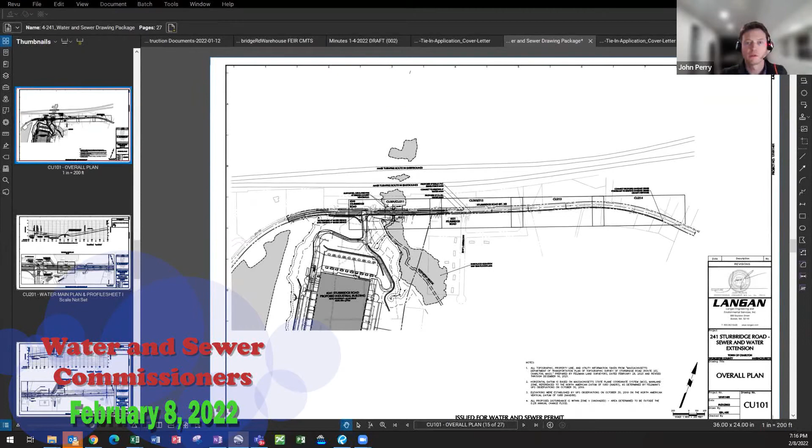What we're proposing is, currently in Sturbridge Road there's a 4-inch water line that comes down from the 10-inch. There's a 10-inch line that stops right around Mayberry Lane and turns into a 4-inch. So we're proposing to install a new 8-inch line to service our project, and we'd keep that 4-inch line in place until the 8-inch was installed and tested and approved and active, and then at that time we would abandon that 4-inch in place.

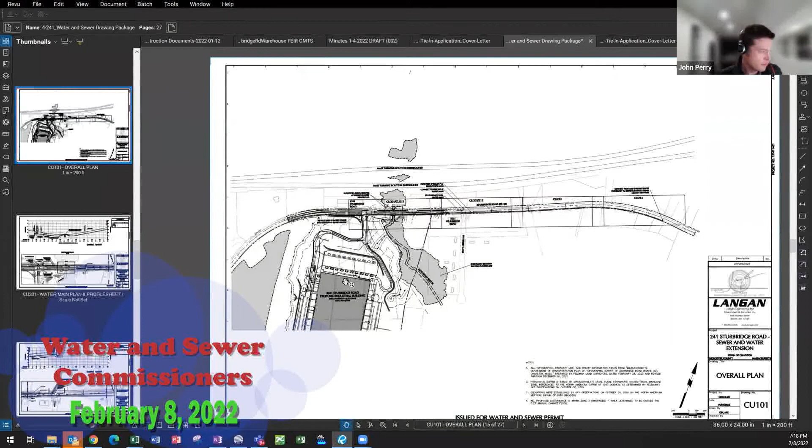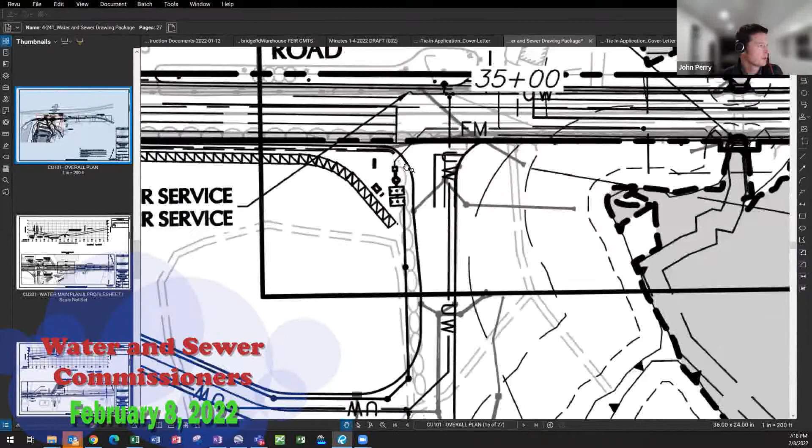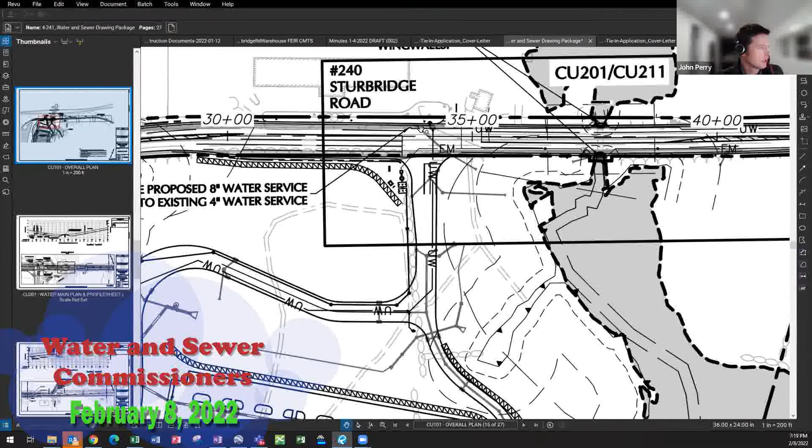This is the warehouse building here, and this is our proposed site driveway. So our pump station would be here, and our water connection for the site would tee into the new 8-inch line that we propose to bring down the street.

The pump station, Peter and I have coordinated on this a bit in the past, basically to design a pump station that is going to minimize the impact to the town system.

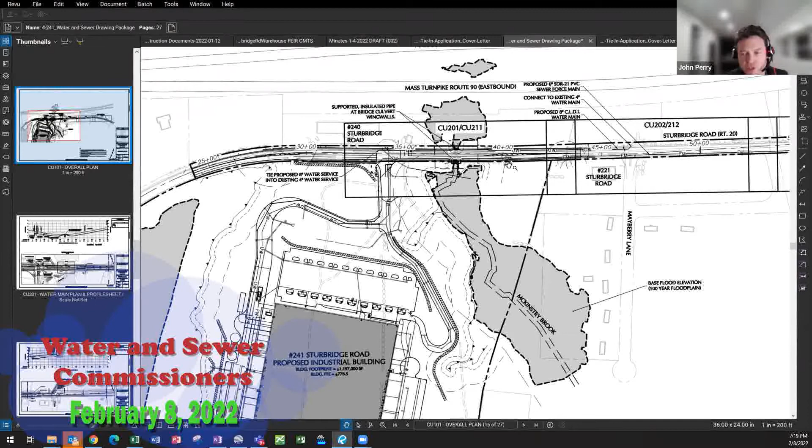So what we're proposing is a time-dosed system, and we would propose to pump basically overnight from 7 p.m. to 7 a.m. The theory there is that, assuming most of the flow you receive into your system is during the day, we would try to offset that to the extent we can.

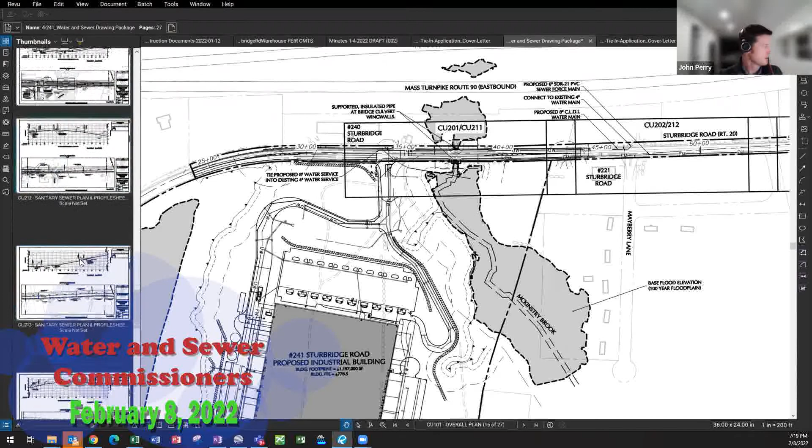So we would have, and I'll go to the detail plan if you bear with me for a minute. This is our pump station detail. We're proposing 2 holding tanks, each 7,500 gallons. So we would have 7,500 gallons of holding storage for the daytime period, which is obviously half of the daily flow.

And then we would discharge that overnight, as I mentioned before. The other 7,500 gallons is just emergency storage, just in case we have a peak in there or something like that. This would be hooked up to an emergency generator as well, so we've got some redundancy in there.

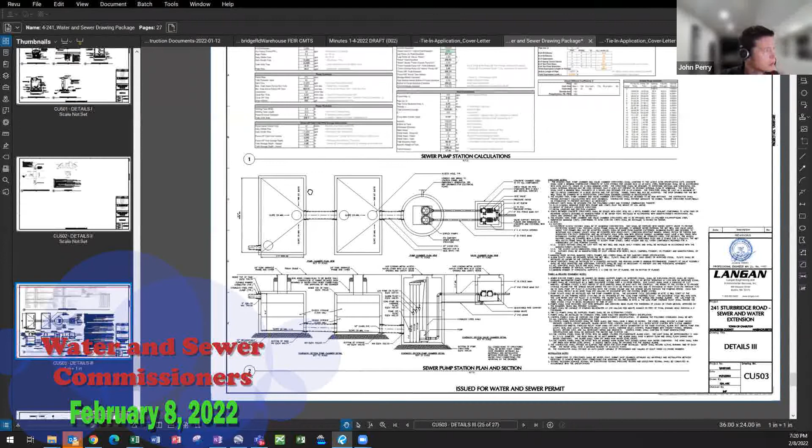That's the highlights. I'd be glad to get into any further detail or answer any questions.

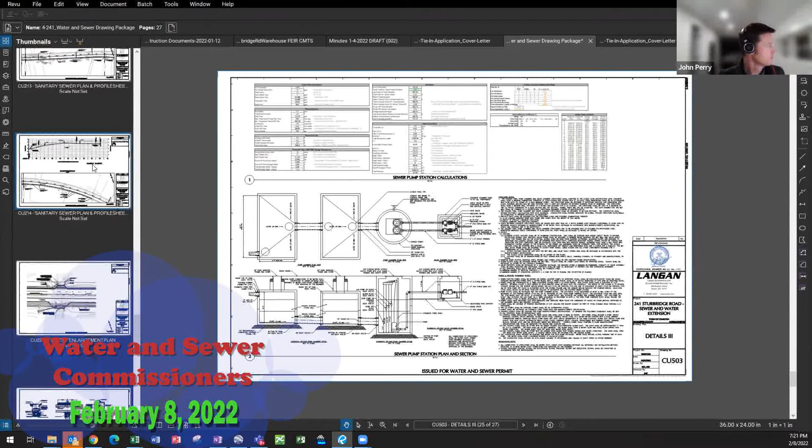John, can you talk about the laterals that you're leaving for the properties that you passed for the sewer extension? Yep, exactly. So go back to that main sheet. It's a little tough to see at that scale, but we are proposing 2-inch laterals off of the force main, and we have a lateral basically for each property between our site and where we tie in via gravity.

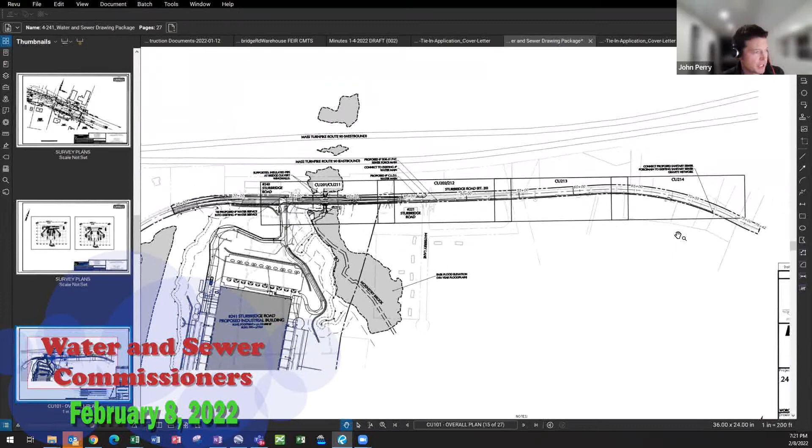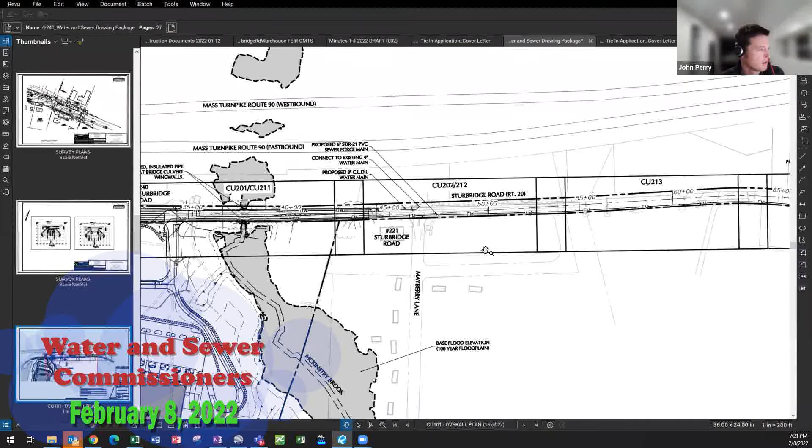We'd be providing a lateral for number 240 Sturbridge Road, 221 - there's a few lots that I believe are vacant lots, just looking at Google Earth coming down the way. I think we have something like 14 laterals along the way. There clearly aren't that many active sites there, I guess, but planning for the future, right?

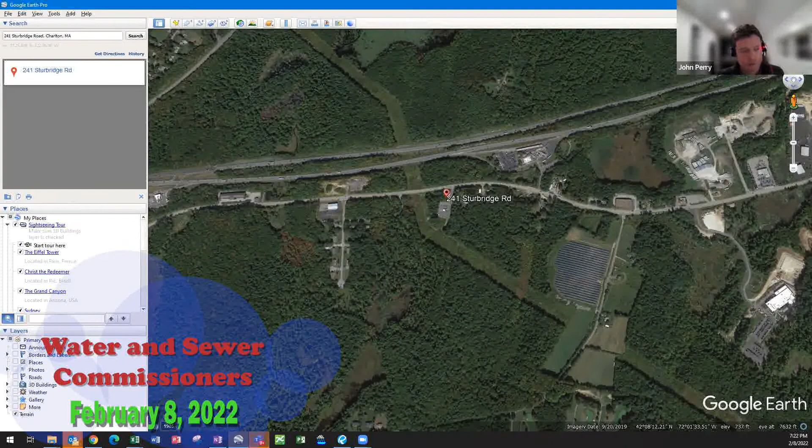So anticipating that those would probably be grinder pumps. I saw in your town standards, you want a 2-inch minimum force main for a grinder pump, so that's what we're proposing.

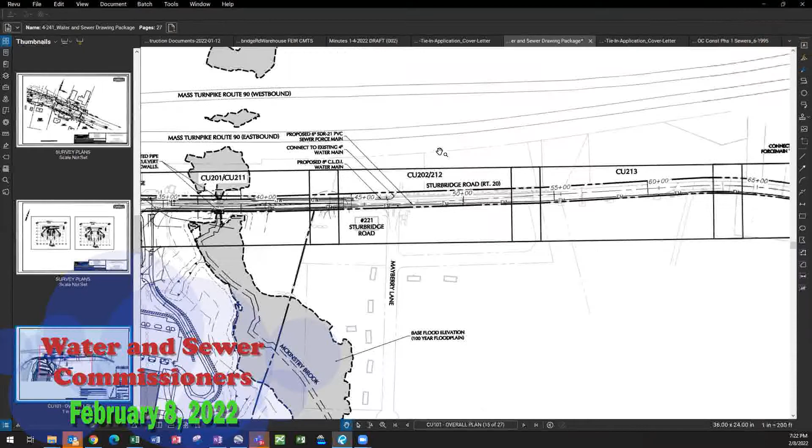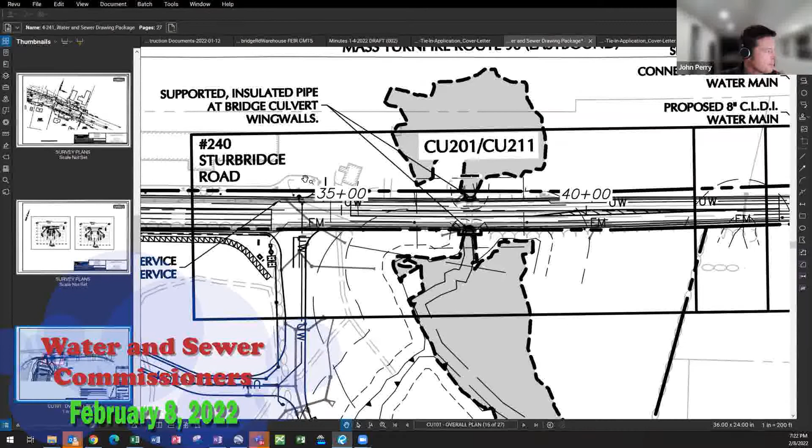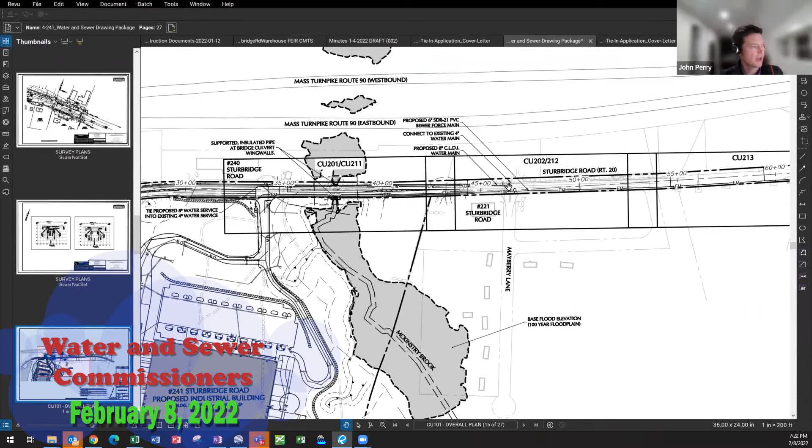We are also proposing a stub for number 240 Sturbridge Road for water as well. And we would be redoing the connection to Mayberry Lane for the water connection there too - I think that connection comes off of the existing 4-inch line, so we would be basically replicating that just to maintain their service, obviously.

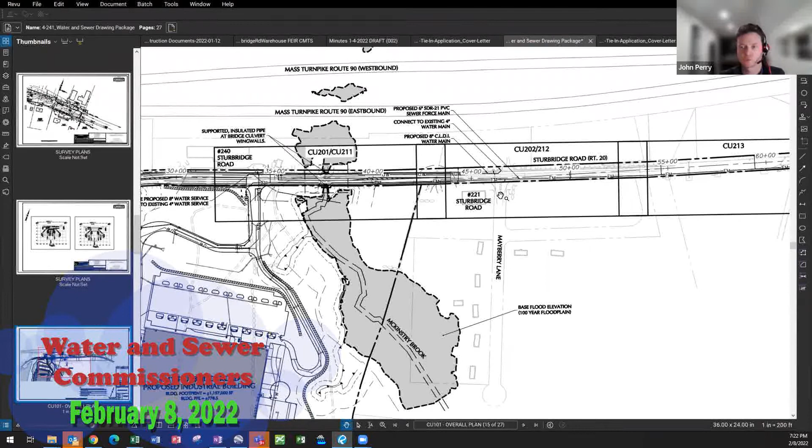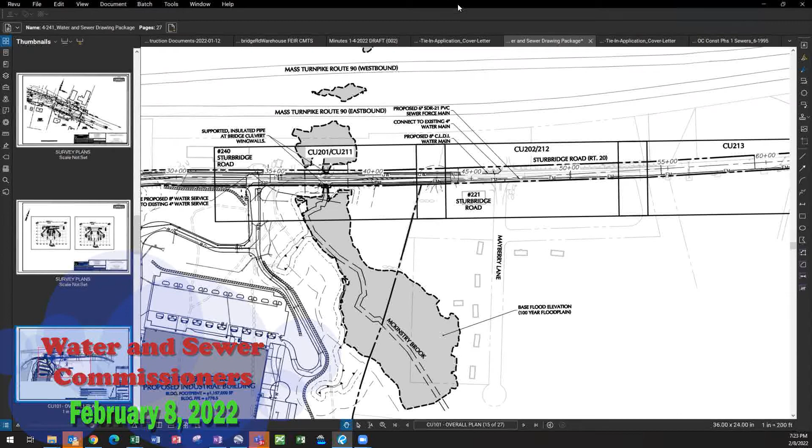I guess, do you want to let Chris McClure go first with his review, or do any board members have any questions at this time? Yeah, no, I'd love to hear from Chris and then take questions from there. I'll stop sharing.

Okay, good evening, folks. And I apologize, I was in the process - I just got these plans about a week ago. I will type up my review questions. But while I have John online, I'd just like to run a few things by him and also talk about the historical requirements by the commission and see what direction the commission is going to want to go with this type of project. So, John, if I could, is there a SIC code associated with this facility?

Industrial code - I ask because of the potential need for an industrial discharge permit connection through Mass DEP. Nope, there's not. And it's manufacturing - so is it a manufacturing facility, or is it just a warehouse, dry goods warehouse? Yep, dry goods warehouse, okay.

So we used warehouse, with no cafeteria, as the basis for the design flow - 15 gallons a day per person, estimating 1,000 employees here.

Is there a tenant identified for it? Is that unknown, saying that's why it's going to be a warehouse? Still unknown at this point, Chris. Okay, so there's no potential for industrial use to go in there, and I guess if there was, they would have to come back in front of the commission for that.

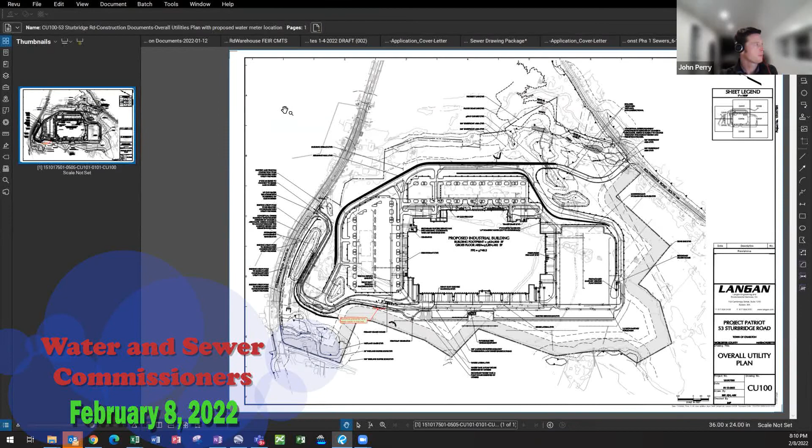I can. I don't have a great plan pulled up right now to show you, but what I can do is at least pull up the plan I do have, which is our utility plan. And actually, while I have you, I want to ask another question, just after I show you this. This is the utility plan. Actually, I wonder if I have a better sheet. Give me one second here. Let me show the roadway just a little bit better.

And the roadway is still being developed. The roadway improvements plan is still being developed. So what I'm going to show you is not final. It's conceptual at this point, but it's a good idea of what we're planning to do.

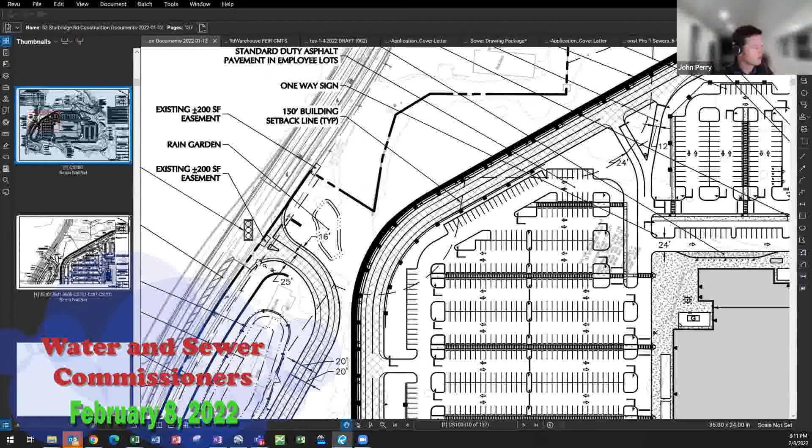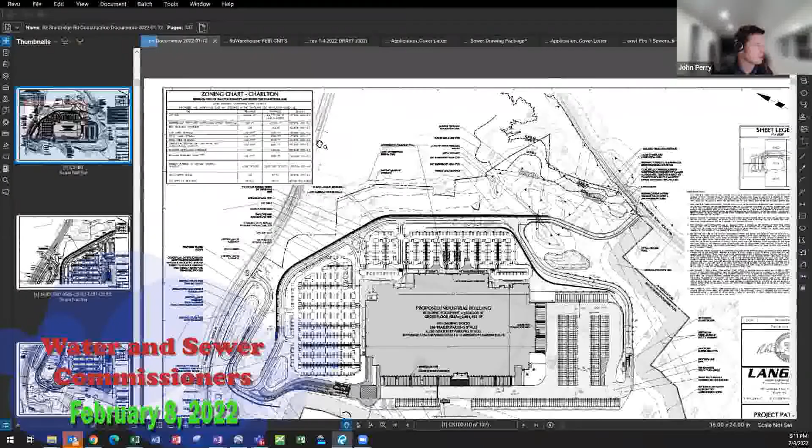So at the driveway of the site, which is here obviously at 53 Sturbridge, we're going to be adding a turn lane, a traffic signal, and then a turn lane in to our driveway from a left turn lane in from the east, and then the right turn lane in from the west. And that's going to require a new lane in each direction, so some widening of the roadway, which as we go easterly towards your pump station, and of course my zoning chart is right in the way of where I want to show you, there is a little bit of widening, but it starts to taper off there.

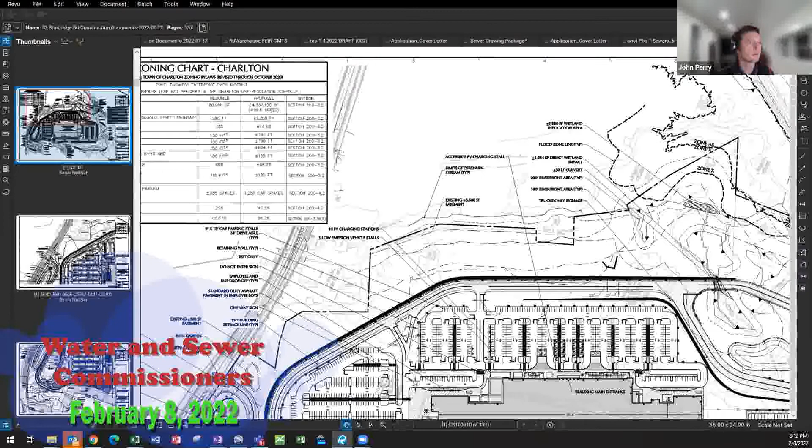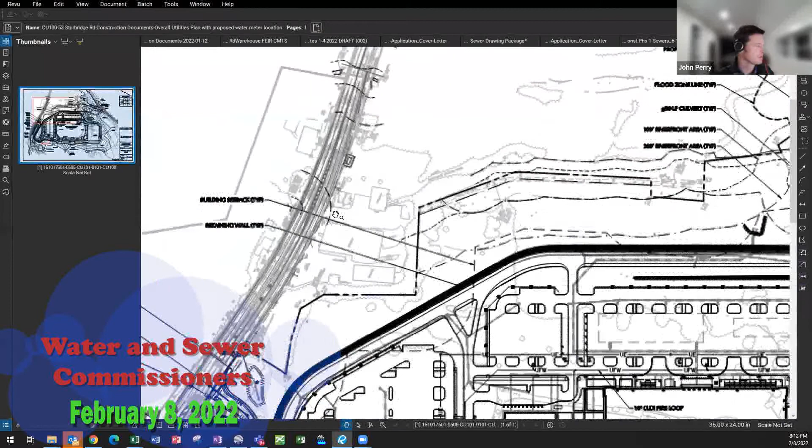Bear with me. Here we go. This is better. As we've been looking, and it's in conjunction with Vanasse and Associates, the traffic engineer, and they're the ones that are spearheading the roadway widening construction design, as we've been looking at the improvements, mainly going to the east, the widening and the site constraints and the grading, we think we may need to - where is your pump station? It's here, right here.

We think we may need to grade a bit in the driveway, not a lot, but as we kind of feather the grades out from the roads to existing, we may need to come to you to request some grading in your property, basically in your property of that pump station there, just to make all the grades work. So we don't need retaining walls, and then just to have it all blend back together into the driveway to get down there. So that's still being worked out, but just to give you the heads up that that presentation will likely be coming at some point in the next couple of months. And maybe since we possibly need to add another tank there, maybe we're doing work there anyhow, and it all works out.

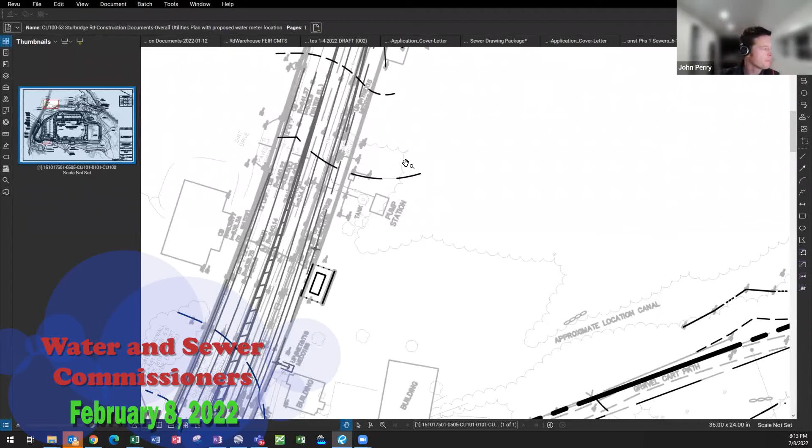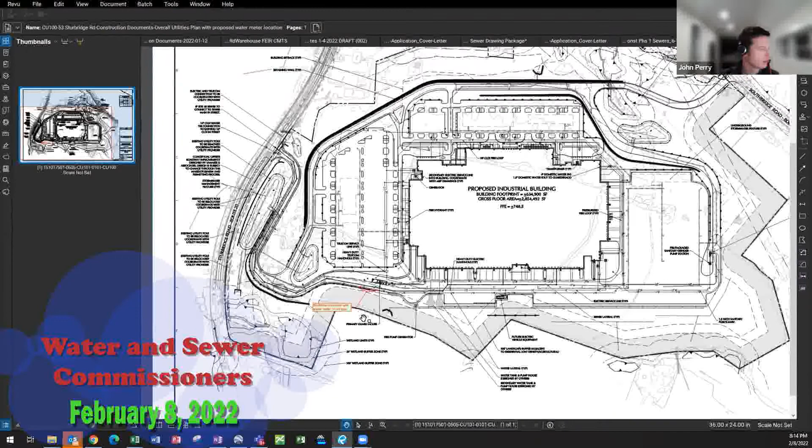The other question I wanted to ask - Pete, you asked me last week about where the water meters are going to be on site. I sent you an email late today, so you probably haven't seen it, but as a team we've resolved this. What we want to do is have a meter here in a hot box. We need a backflow preventer for the fire suppression system, so we'd propose putting the meter and the backflow in a hot box here.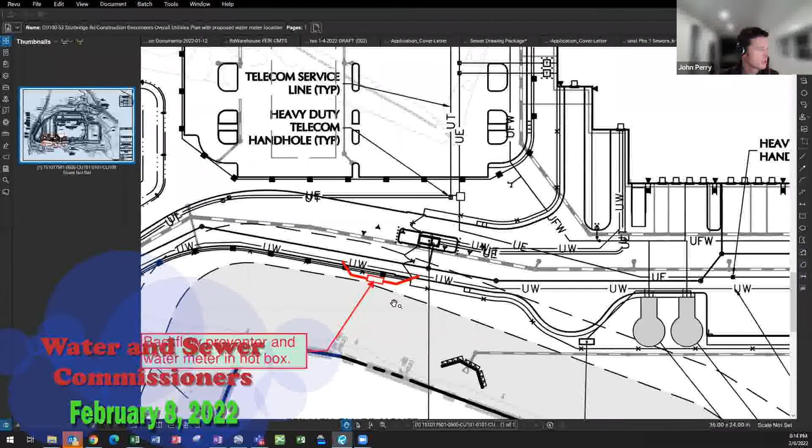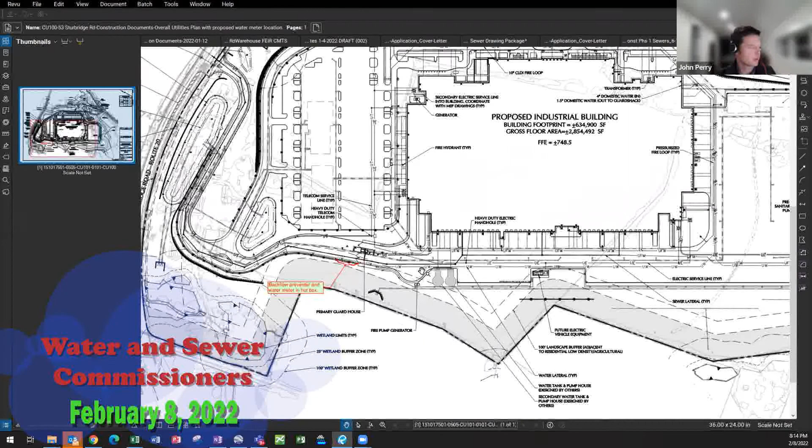There'd be one meter for everything. Originally we proposed our domestic water coming in on this corner of the building - it's 6 inch, not 4, that's a typo. We'd have a meter there, but couldn't find a great place to put the meter for the fire suppression. There are tanks here, but no room in the pump building, so we want to put it in a hot box out here. We want to keep it close to the building because we need to run power for the hot box to heat it, and since it meters the backflow for the fire suppression system, it also needs a fire alarm, so we need to run conduit for that too. That's why we chose that location.

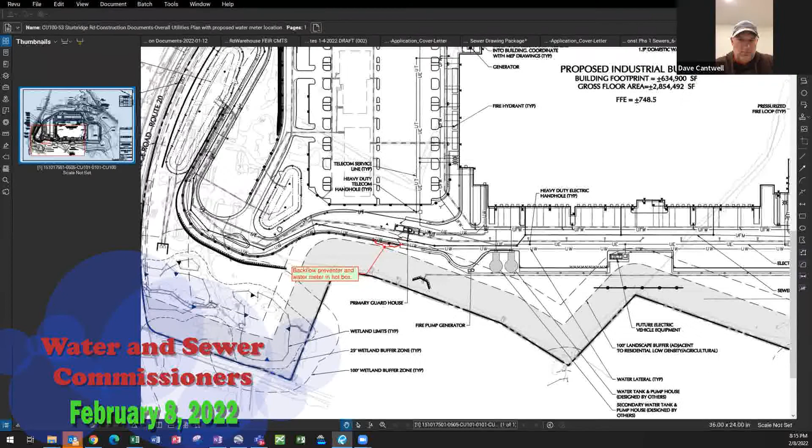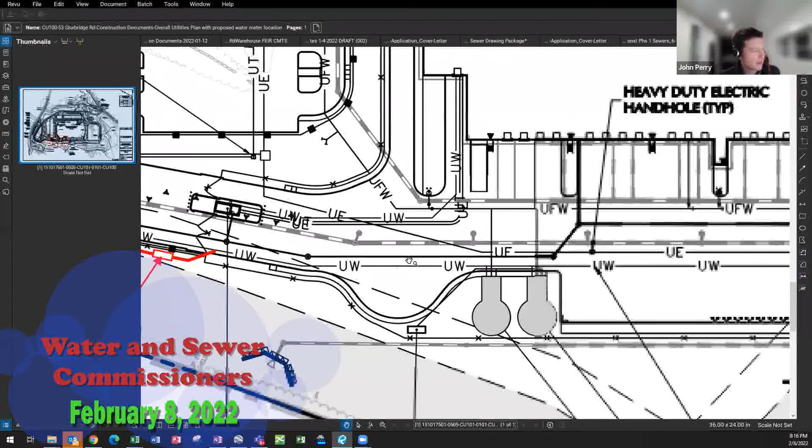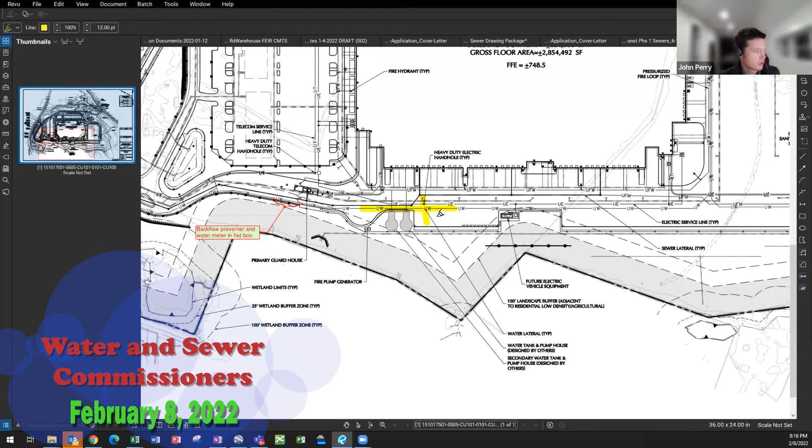So you're not proposing a dedicated fire suppression line and a 4-inch domestic line? We'd have a 10-inch main coming up from the 10-inch in Sturbridge Road. We're going to tee in with a 3-way 10-inch tee, come up our driveway, have a meter, do a couple 45s, meter here, go back in - still all part of the main. That main feeds the tanks, and continues on - let me highlight to show you - continues over here, at which point we'd neck down from a 10 to a 6-inch for the domestic, and that comes around and up into the building.

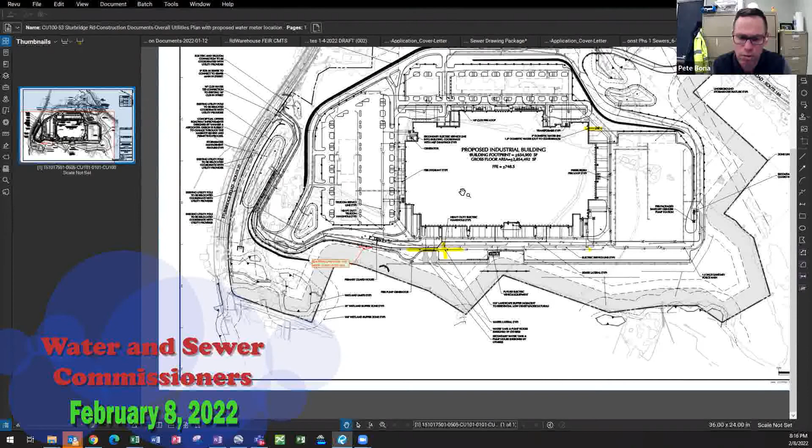Is 6-inch required? That seems excessive. Yeah, apparently it is - it's a big building. Fair enough. I think that hot box will work out well - very similar to what we just allowed at the Heritage School and Middle School for their water line connections. Instead of a meter pit, they did that hot box where everything is located out there. It's heated and easy to get to work on.

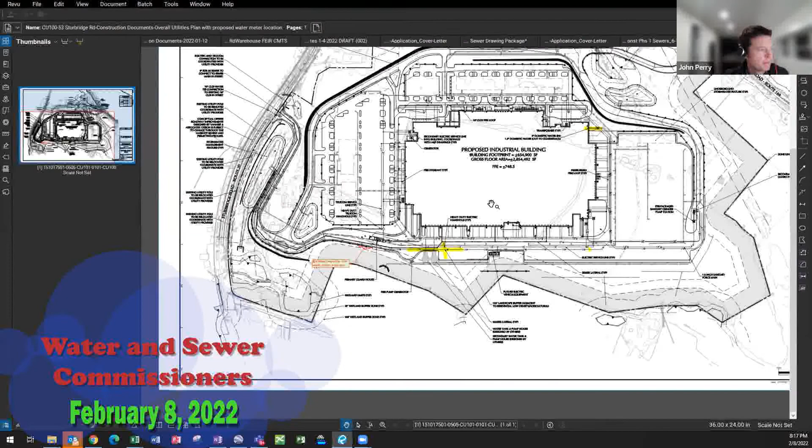So again, Southbridge will have a review of this as well and see what they have to say. But I'm guessing you're probably going to do the same thing on 241. They had a bigger structure for the fire suppression tanks at 241, so they were actually going to put the meter in there - a dedicated meter for the fire suppression system in their fire pump room.

So to follow up - for 241 Sturbridge Road, you voted to provide a will-serve letter accepting the capacity for water and sewer. For 53, we never really got that technical or formal with it, and if the commission doesn't have any concerns, I think it's important that we vote to do the same type of will-serve letter to make sure we're all on the same page and everything is good to go with this project, especially with Mr. Jennings identifying our concerns about the additional flow - we're looking at this as a new partnership moving forward.

John Oatley, you don't see any issues with them tying in? No, not at the domestic waste level concentration. Obviously the pump station, as everyone has discussed, is the bottleneck. We definitely need a robust solution around that.

So whose job is it to come up with that solution and propose it to us, and when's that going to happen? I think it's my job. When is that going to happen? As soon as humanly possible. Do you think you can have that in a couple weeks for the next meeting? Yeah, I think that's the critical item to resolve with Chris McClure before we all show up to the next hearing - maybe not all the nitty gritty details, but at least what the proposition is going to be to resolve that.